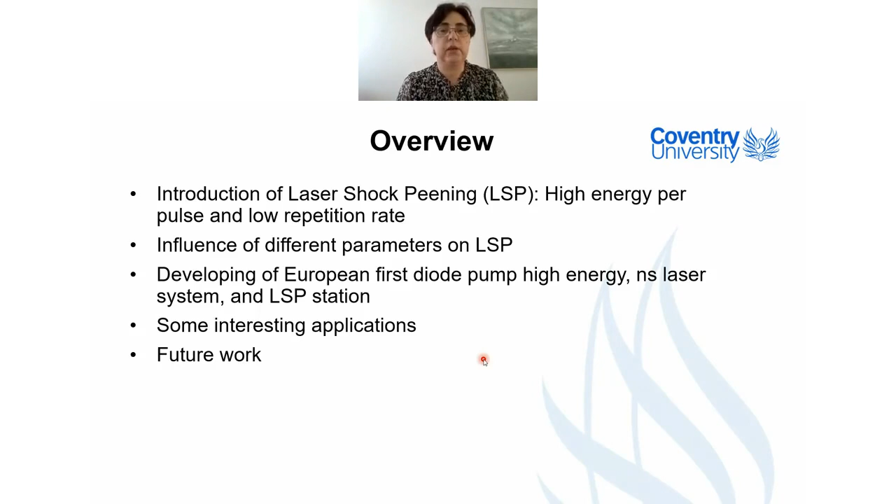Thank you, Sam, for introducing me and giving me the opportunity to speak today about laser shock peening, a very nice laser-based technology. I will be speaking mostly about this technology from the point of view of what is important from laser parameters and why we need certain kinds of special parameters there.

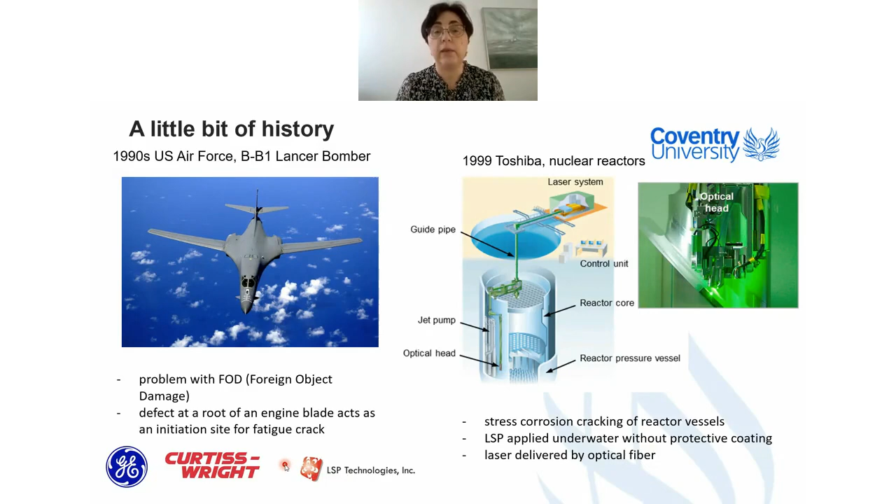Here is the overview of my talk. I will be starting with the introduction of laser shock peening, and I will be speaking on something targeting the so-called high energy per pulse and low repetition rate regime. I will explain the influence of different parameters on laser shock peening. Then I will share with you a little bit of experience of developing the first European diode pump high energy nanosecond laser system, which was adapted for laser shock peening, and also speak a little bit about how the laser shock peening station was developed, and show you some interesting applications. And I would finish with my view on future work.

So a little bit of history. Laser shock peening started to be implemented more or less at the same time, almost in America and in Japan, for two completely different applications. In America it was implemented by GE in order to solve so-called foreign object damage, while in Japan, Toshiba was solving stress corrosion cracking in reactor vessels.

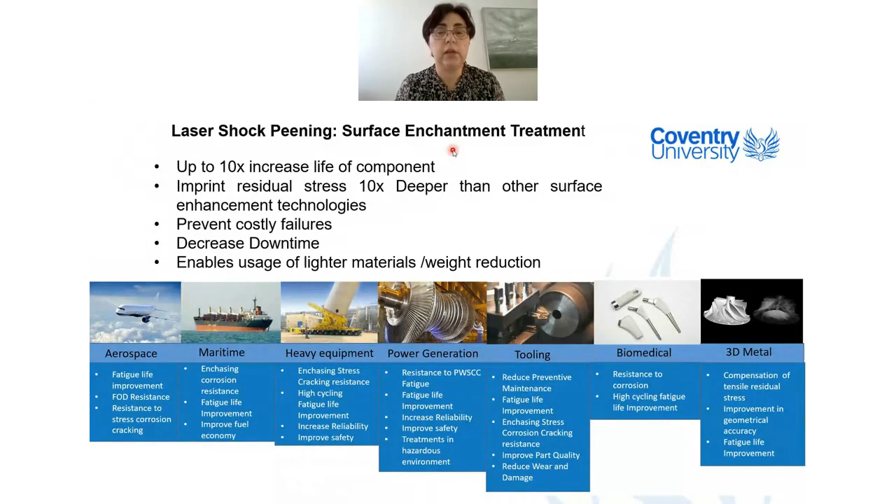Very soon after that, the first metal improvement company was established, which is now Curtiss-Wright, offering mostly laser shock peening as a service. We have one of their cells inside of Rolls-Royce, for example. Laser shock peening technology is also offered by an American company which is nowadays offering the machine for laser shock peening.

Laser shock peening is a surface enhancement treatment, which allows you to increase the lifetime of critical components up to 10 times. It's imprinting residual stress 10 times deeper than other surface enhancement technologies. It's helping you to prevent costly failures, decrease downtime, and enable usage of lighter materials. I've just listed different kinds of industrial sectors where laser shock peening was tested or is already implemented.

As I said, I will go on to speak about laser shock peening in the high energy and low repetition rate regime. First, I would like to say that laser shock peening is a cold working process, meaning that you are not melting the surface with this process.

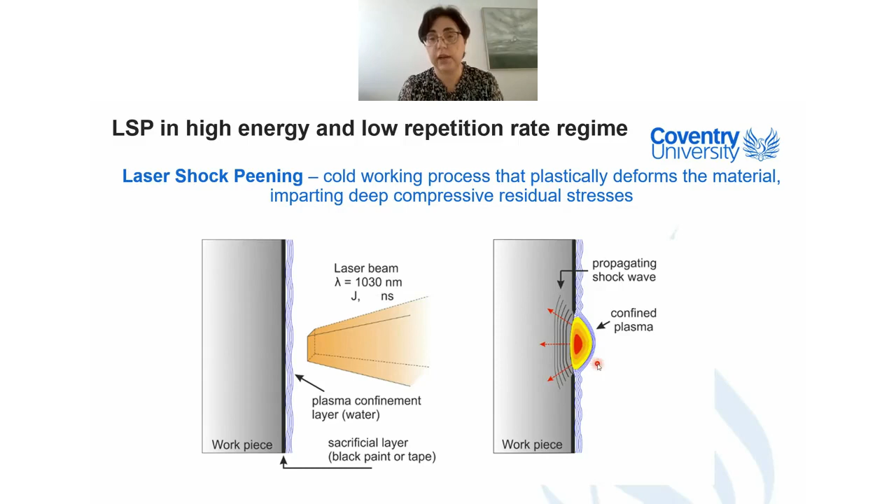This process plastically deforms material and imprints deep compressive residual stress. When I say deep, we are speaking about more than millimeters.

Here's how that looks: you have your workpiece, then you put a so-called sacrificial layer. Here is the black tape, usually a vinyl one. This tape has two roles to protect your workpiece from heating and also for being ablated to create the plasma.

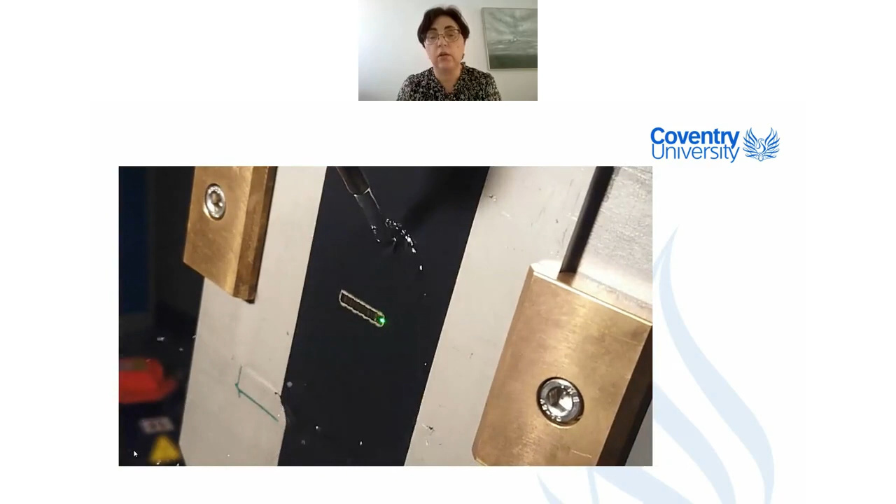In this regime, you're using a laser beam, usually infrared, in the joule energy regime with nanosecond pulse duration. Once this pulse ablates the sacrificial layer, plasma will be formed. If there's no confinement media, in this case water, the plasma will expand, leaving very shallow residual stress in the surface. But if we put water on top, there's no space for the plasma to expand, so a shock wave will be created and propagate inside the material.

So how does that look... can I start this video? I can't start the video now for some reason. If you turn the laser pointer off for a second. I'm trying, yeah, okay.

So here is the video. As you see, we have the part. The green light is not a laser, it's just a light showing you where the laser pulse is coming from. It's infrared in this particular case.

You have the black tape, and there is a water layer. You see the water layer is really thick, a couple of millimeters. The laser pulse is coming next to each other, ablating the material. In the moment when plasma is not confined anymore, you see the splashes back.

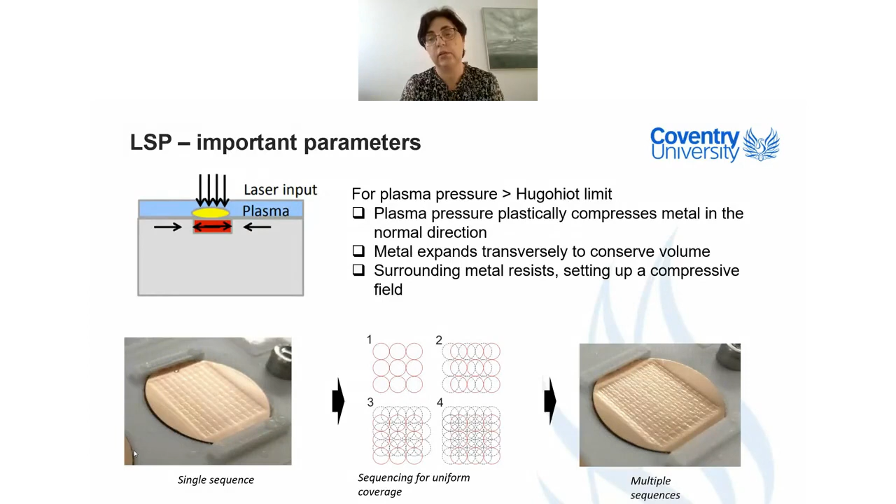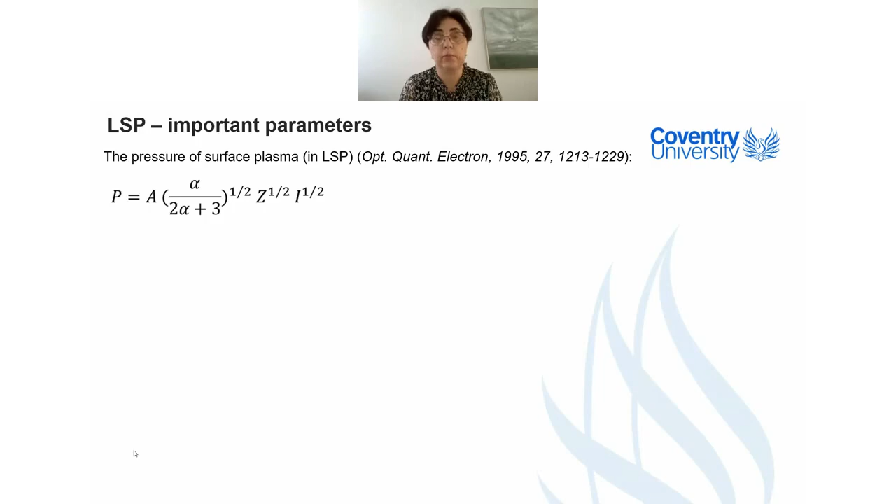So what is happening? We have plasma pressure, which plastically compresses the metal in the normal direction. The metal would like to expand to conserve volume, then the surrounding metal resists, setting up a compressive field.

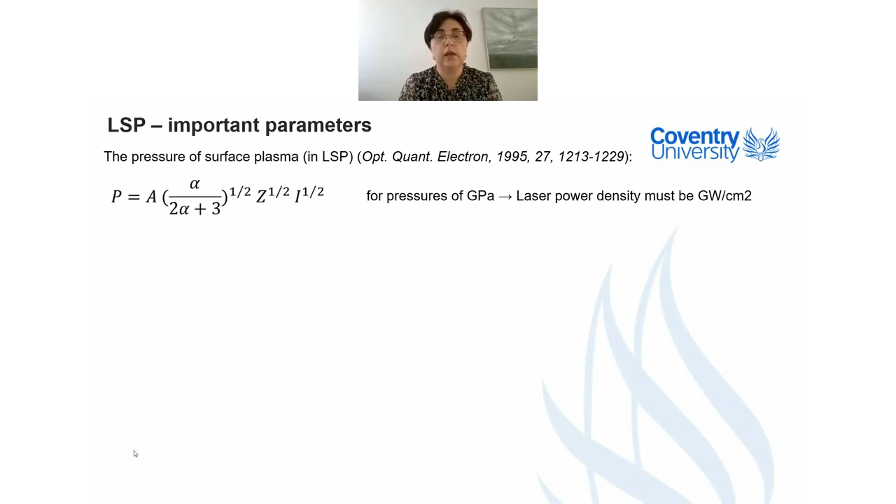So now, as you see in my video, by treating an area, moving the laser spot next to each other, you can create residual stress over the treated area.

Here I also would like to point out that you can use something we call multiple sequences. Basically, you put one tape, treat it with overlap or no overlap, then remove the tape, put a new tape, and shift the next pattern a little bit. That way you're controlling how uniform the treatment is around the area, and you also reduce the roughness of the treated surface.

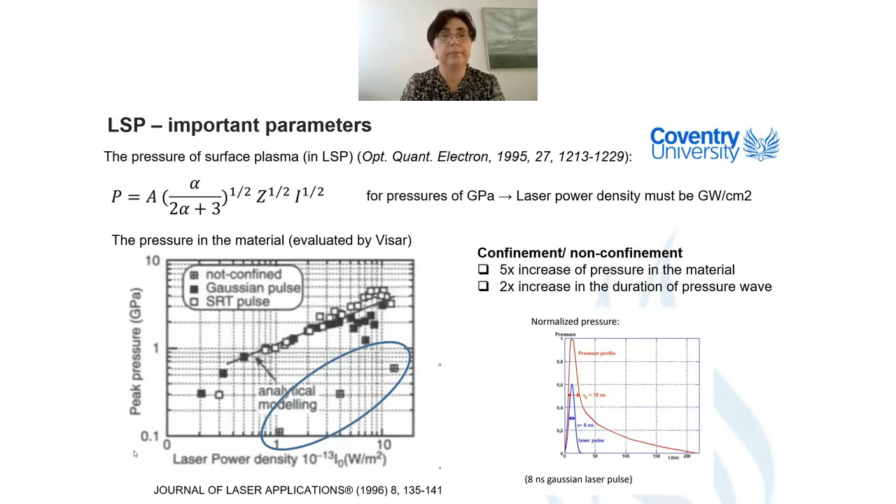I'm first going to point you to an article published back in 1995. In this article, you can see that for a pressure of a gigapascal, you need laser power density in the region of gigawatts per square centimeter.

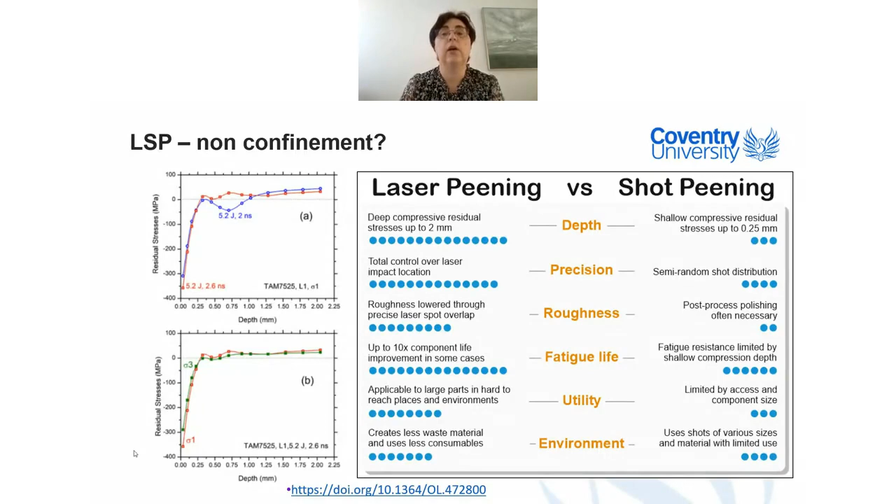First, I want to show you something on this graph. If we don't have confinement media, as I said, we can put some pressure inside the material, but with confinement media, we increase the pressure up to 5 times. In addition, we increase the duration of the pressure wave. Why is the duration important? This sets the time for how long the change will be traveling inside the material, or more specifically, how deep you will imprint your change.

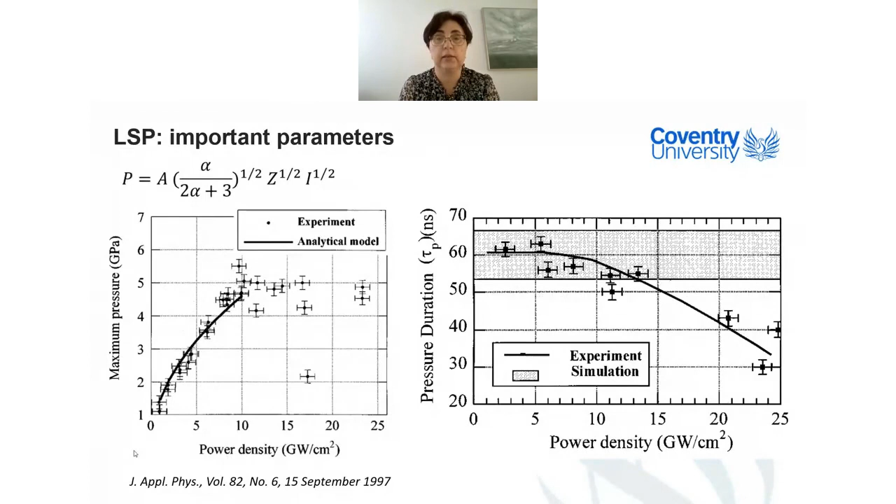So can we do laser shock peening without confinement? I know there's a recent publication about that. Yes, as I said, we can put residual stress on the surface, quite high level, but it will be very shallow. Laser shock peening is a method mostly trying to find applications where shot peening is not applied, and one of the main benefits of laser peening is the capability to go very deep into the material. So yes, you can do it, but using such an expensive, high energy laser is, from my point of view, a bit of a waste.

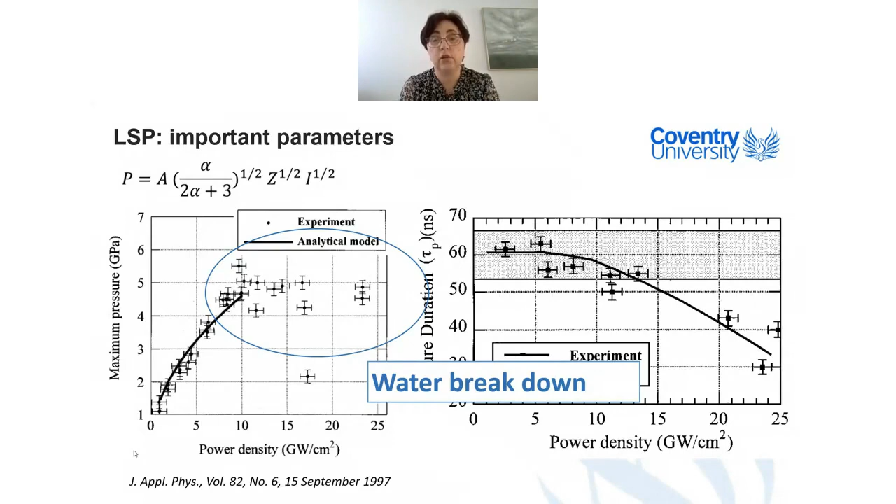Another important parameter: if we look and say pressure depends on power density, everybody would say, okay, let's increase power density to infinity and get whatever I want for maximum pressure inside the material. But unfortunately that's not true, and it's not possible, as you can see from the graph on the left side.

Around 8 to 10 gigawatts per square centimeter, we get some effect which stops us from increasing maximum pressure in the material. At the same time, pressure duration inside the material starts decaying, and the reason for that is called the water breakdown effect.

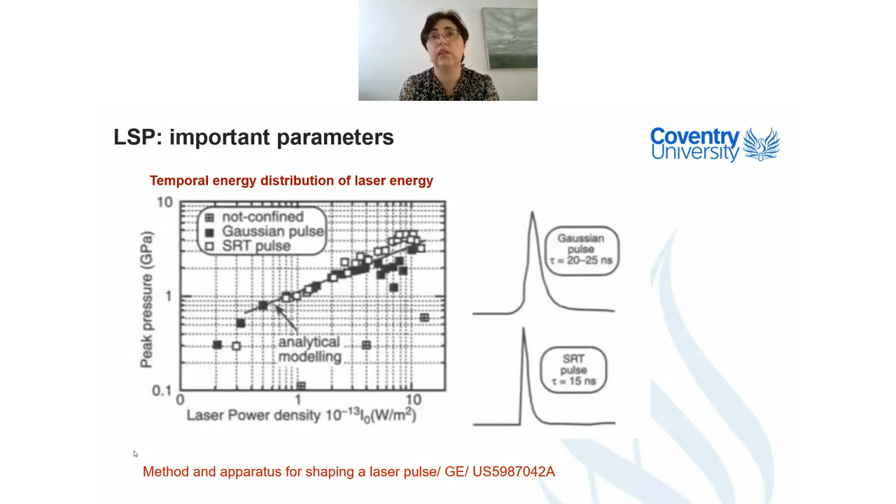How to explain that best? Water, in this case, is the confining media, meaning it has to stay transparent and should not interact with your laser. In the regime when we reach water breakdown, meaning your laser starts creating plasma in the water, this plasma will be reflecting the beam in some cases or absorbing the initial energy.

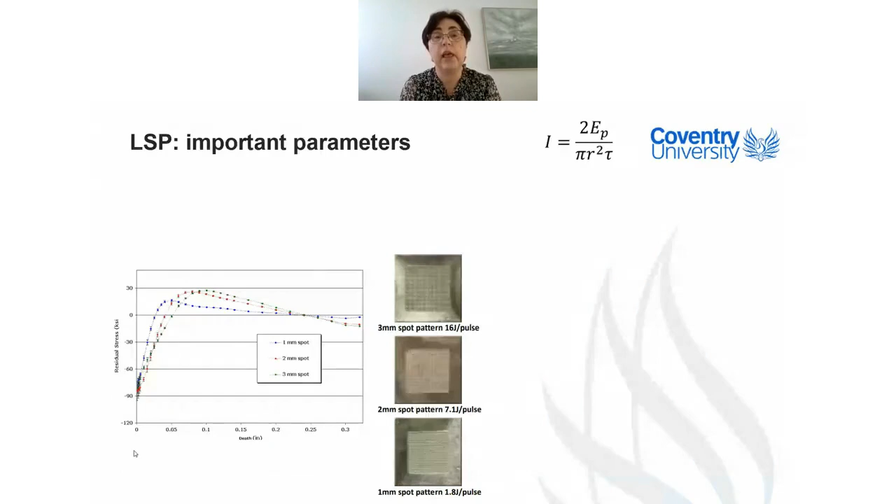Another thing I'd like to show you is some temporal energy distribution trick. If you look at this graph, the black and white squares show that we're having this water breakdown, corresponding to the so-called Gaussian temporal energy distribution. GE put in some invention, already patented, where they were able to cut this initial part of the beam so they postponed this water breakdown. As you can see from this graph, in that way you can increase the peak pressure which you are giving to the material.

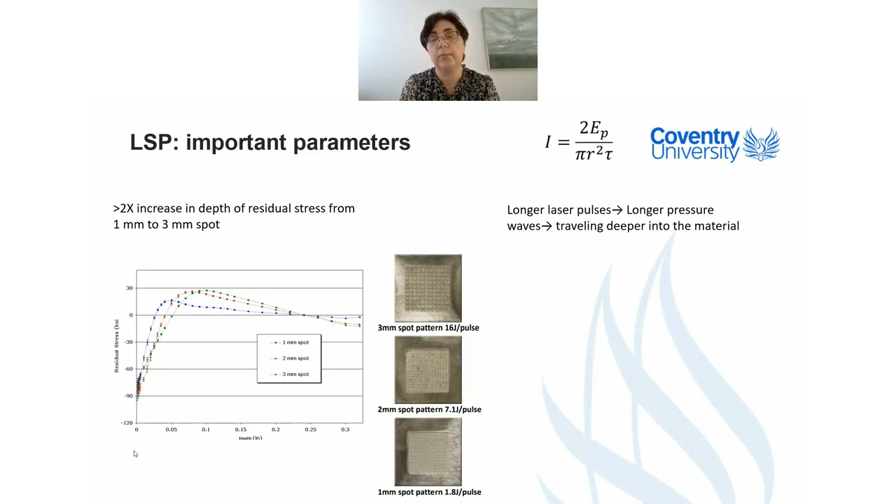If you look at just laser fluence, you'll see that it depends on energy per pulse, pulse duration, and spot size. If we keep the same value but change just the spot size, you can see we increase the depth of residual stress by 2 times if we go from 1 to 3 millimeters. But at the same time, you need to increase energy per pulse from 1.8 to 16 joules.

Not only are you imprinting your residual stress deeper in the material, but larger spot size also increases the speed of the process. Another factor I mentioned is pulse duration. We already saw in previous slides that longer laser pulses mean longer pressure waves, which travel deeper in the material, and you can see from this graph that this is obviously the case.

Here I just want to show you how the cell looks for Curtiss-Wright, because we took inspiration from them. They are offering this service on an industrial level and doing it really professionally and nicely.

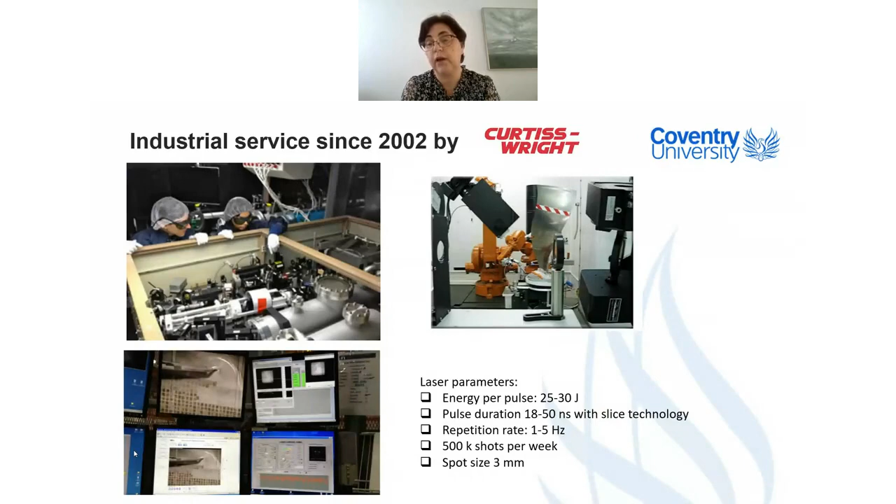Their laser system has a pulse energy between 25 and 30 joules, and I think they even have lasers up to 50 joules. Pulse duration can vary between 18 and 50 nanoseconds, and they have this slicing technology for temporal beam shaping. They use a repetition rate between 1 and 5 hertz because their laser is a so-called lamp pump system.

Being very advanced in laser technology, they know that those lasers can sometimes be unstable. This is why you see in the picture, bottom left, screens showing the monitoring of every laser pulse, both after the laser and also on the material.

At the top you see probably one of their more complex stations, where they have a part mounted on one robot. Water delivery is on another one - you don't see it, it's on the back side. And the black box close to us is a scanner, responsible for beam distribution.

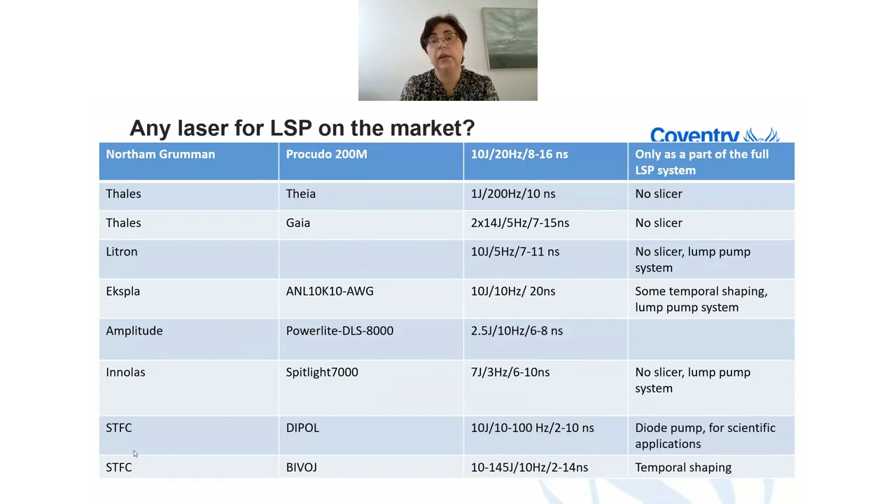For example, the question was even more complex when we were starting to approach laser shock peening: can we really buy or find a laser for laser shock peening on the market? So I put here, besides the Northrop Grumman laser, which is American, lasers which are produced in Europe.

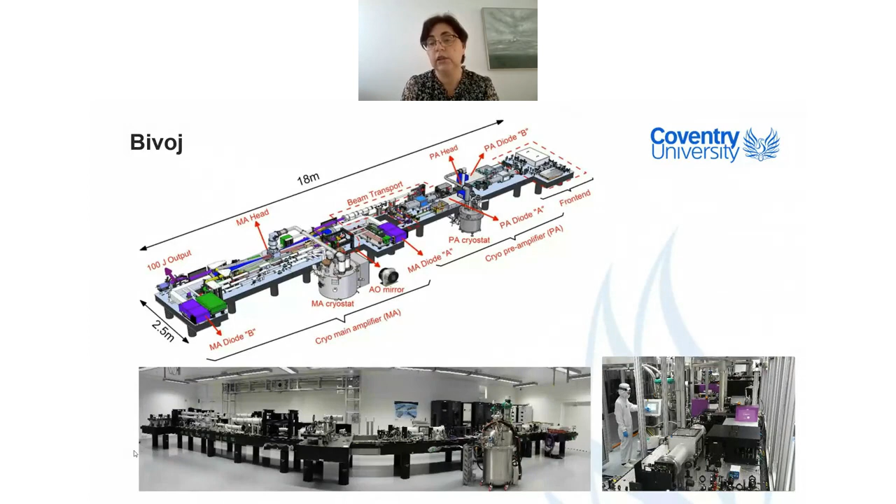And on the bottom you have two industrial scientific lasers. First, what you can see from this list is that most of these lasers have enough energy per pulse, but the pulse duration is very short. And as you'll recall, and will also see from some applications I'll show, pulse duration is very important and defines how deep you will imprint residual stress.

Another problem with most of these lasers is that they don't have either temporal shaping or, very often, spatial shaping. And from an industrial point of view, maybe another important point is that most of these lasers are very expensive.

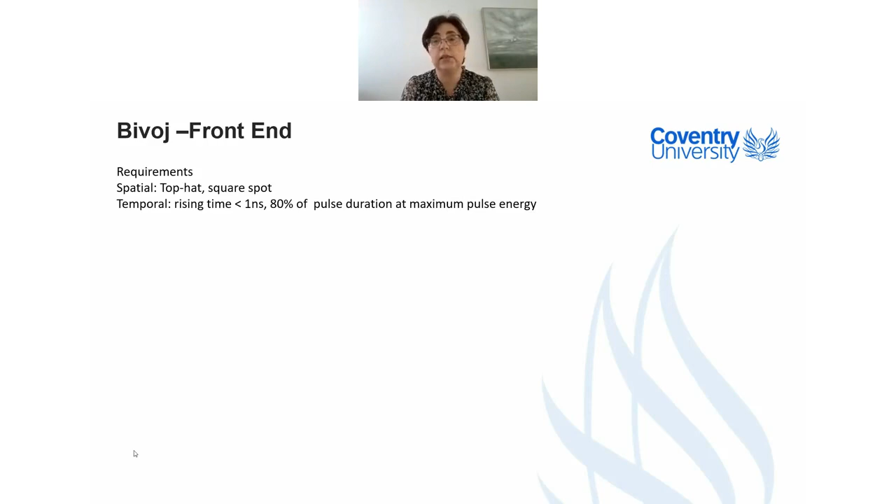I will show here the Bivoj laser. This is the laser that I was involved in developing and adjusting for laser shock peening applications. I will not go into detail about this laser - I'm just showing these pictures to show how complex and how big this laser is.

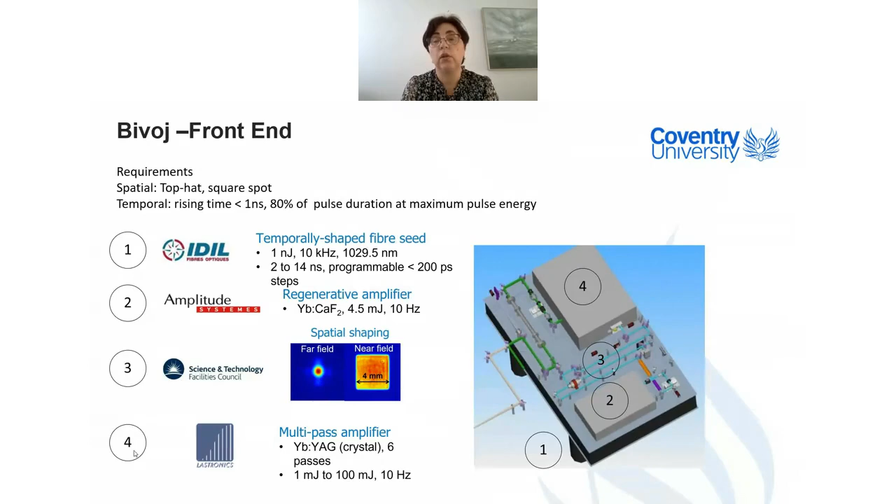For laser shock peening application, we were using only after the first amplification. We are not using 100 joules because there is a missing isolator, which stops reflection of the light coming back to the laser and destroying it.

For this laser, we designed something called a front end, because we wanted to have a top hat beam with a square shape. We also wanted to have a fast temporal rising time, meaning to minimize the time the laser needs to reach maximum energy.

Also, we wanted to have 80% of the duration of the pulse at maximum pulse energy, and for that application such a front end was created and designed. As you can see, it's involving 4 institutions.

Similar to the laser, I will not go into detail about that, but if somebody is interested, I can provide more information. This is the laser cell we had, and the laser beam.

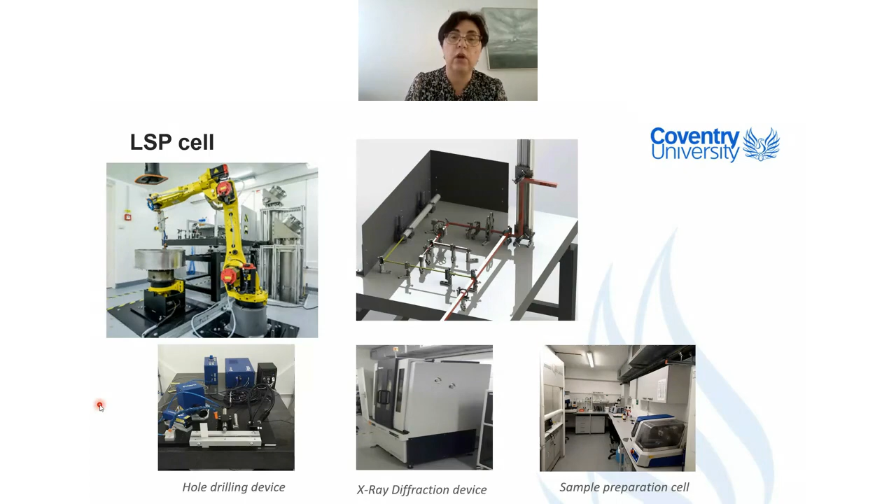It's coming—maybe I can use the pen again. The laser beam comes through this tube because the laser is below the cell. If you look at that drawing, after this mirror, most of the beam goes through the system for controlling the spot size.

Next to the laser, which is not possible to see on this drawing, we had the attenuator, and this additional small part of the beam was used, similar to how Curtiss-Wright uses it, to monitor the laser pulse, both near and far field.

The laser beam is then distributed over the sample, which is mounted on the robotic arm. Here is also a water delivery system. You will see more about this system in some videos I'm planning to show you.

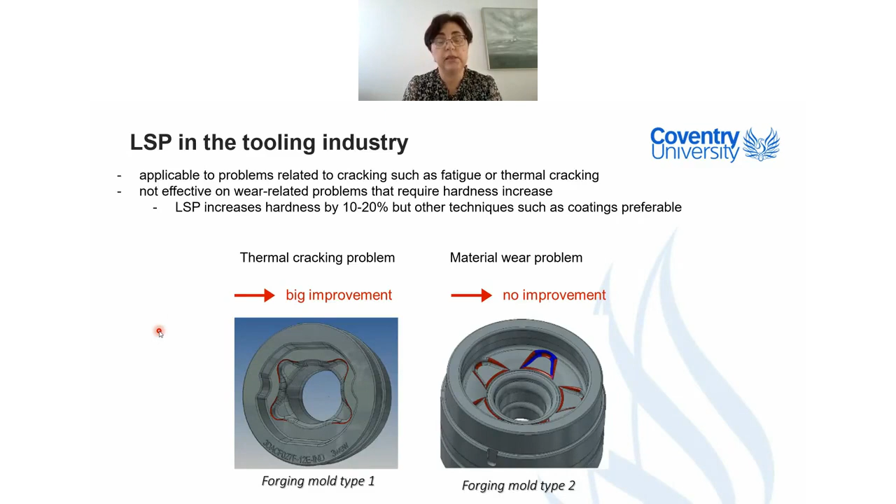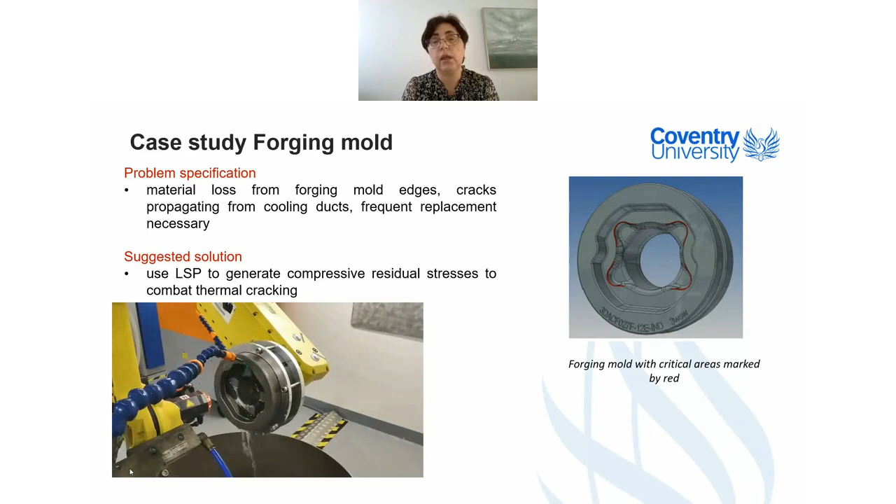So let's show now some of the applications. This is the tooling industry. What I'd like to mention here is that it's very important to understand the problem you are treating. In this particular case, there are two problems: one related to cracking, such as fatigue or thermal cracking, and another related to wear.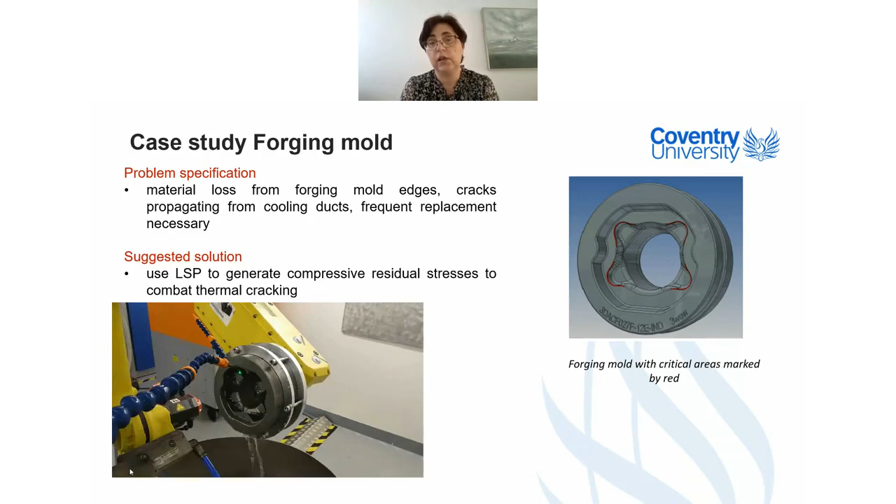Thermal cracking we were able to solve with laser shock peening, but the wear problem, which is usually solved by increasing hardness, we only slightly influenced, because laser shock peening is not a method that increases hardness. So the problem in this particular tool was solved by first doing laser shock peening and then applying very hard coatings.

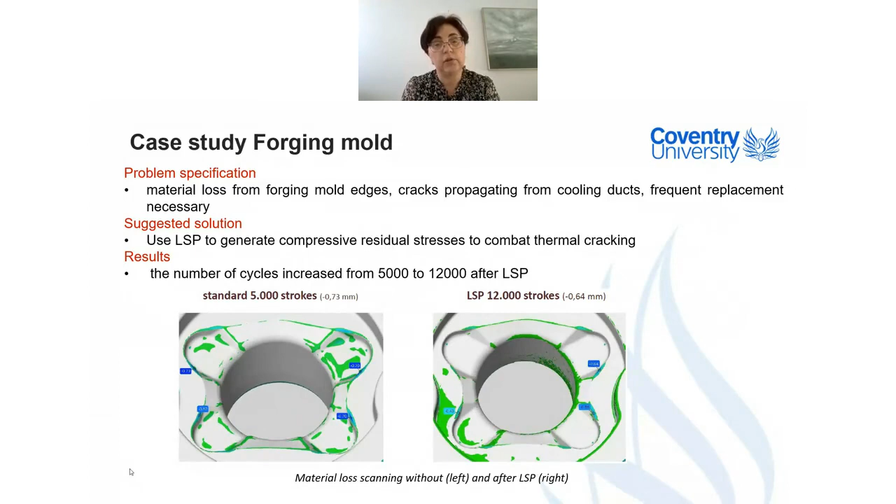Now I have to switch the laser pointer again in order to show you the video of how this part was treated. We are treating only this red part, shown in the image in the right corner. The green light is not a laser—it's just a diode light showing where the treatment is done.

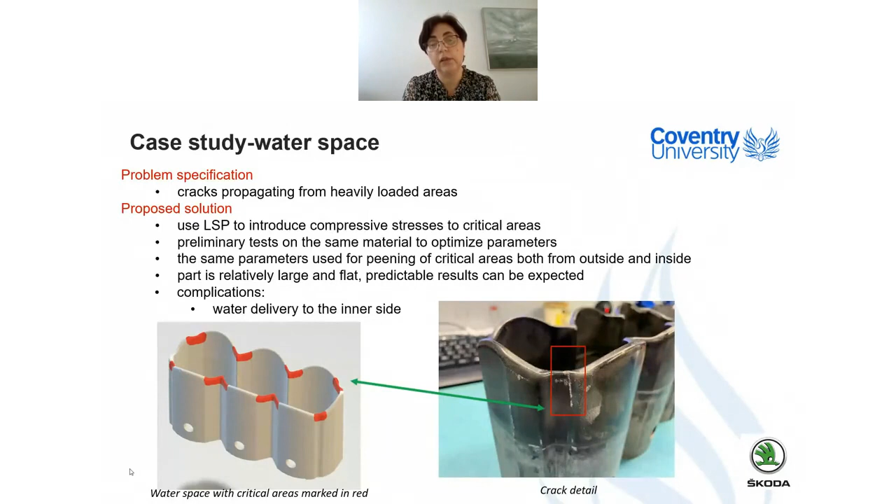As you can see, we are using a 10 Hz laser, but the speed of the process here is mostly defined by the speed of moving the parts. So I think to increase productivity it would be better to use an arrangement very similar to what Curtiss-Wright is using.

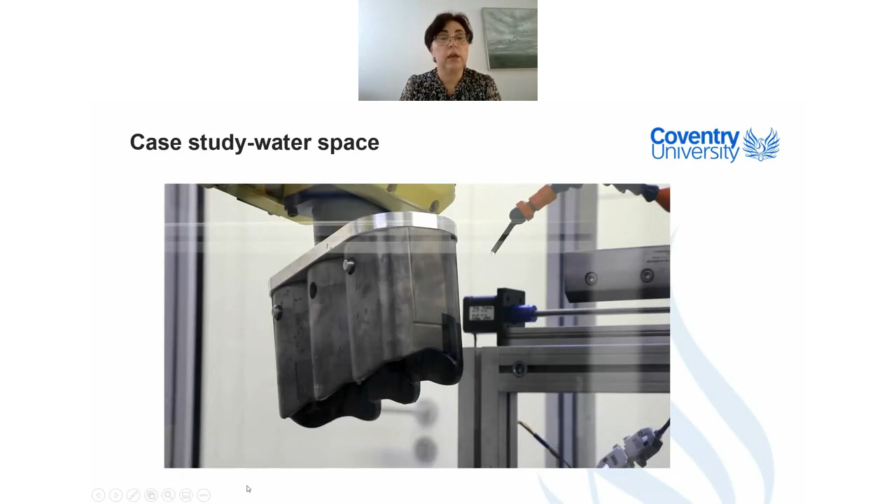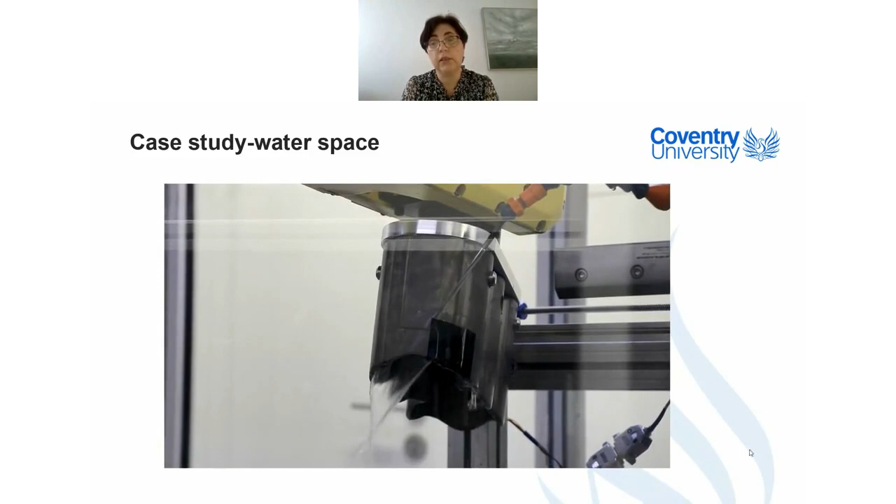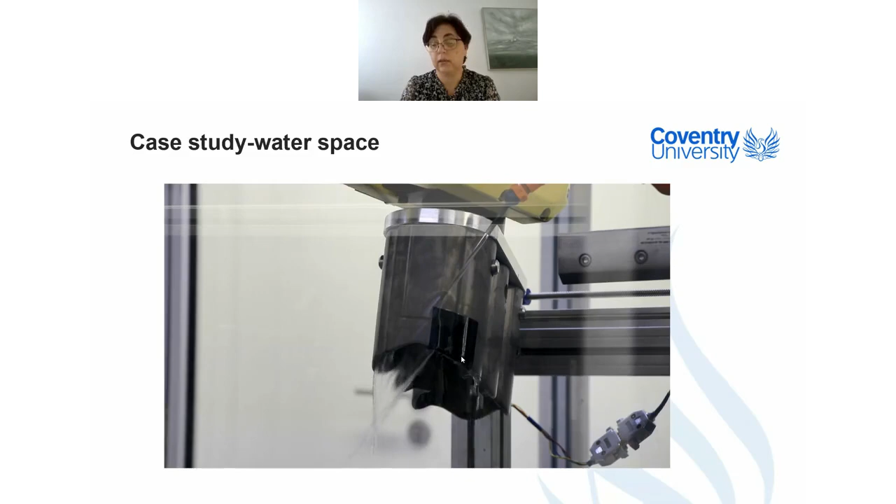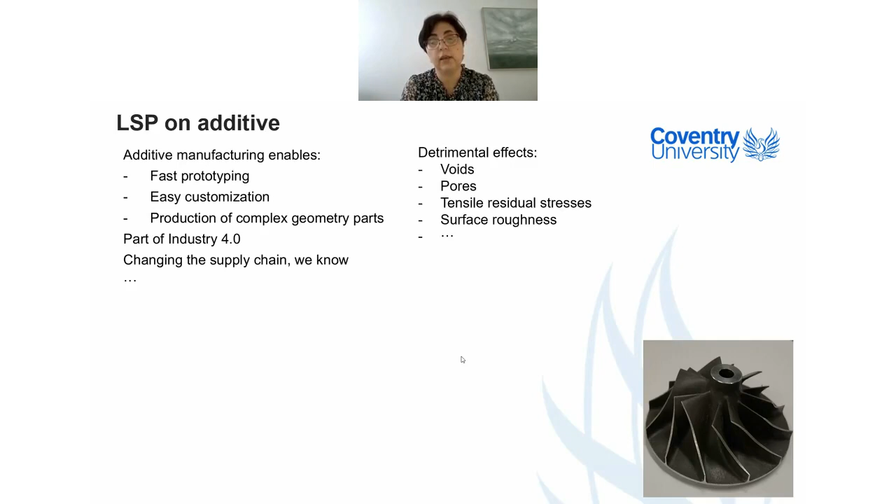Another tool is coming from Skoda, and there you see crack propagation in heavily loaded areas, marked in red on the drawings. In both applications, what was very nice is that since the tools were already in operation, we really knew where the problems were and what kind of problems they were.

Now I will run this video. It will be a little bit noisy because I want you to experience how laser shock peening sounds.

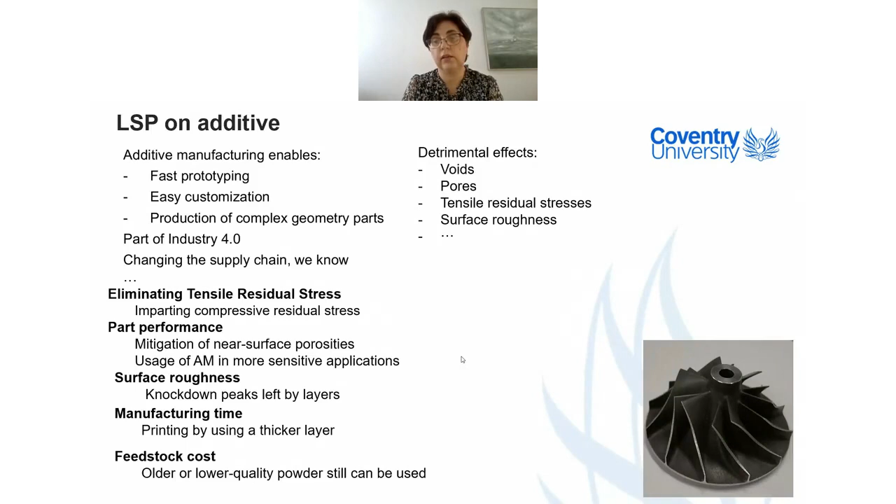So you see the plasma going out and clicking. It's showing that this is really a mechanical process.

After the tooling, one of the sectors we were looking at is additive manufacturing, and all of us are aware how interesting this technology is to industry. But at the same time, there are several problems like voids, pores, tensile residual stress, and surface roughness.

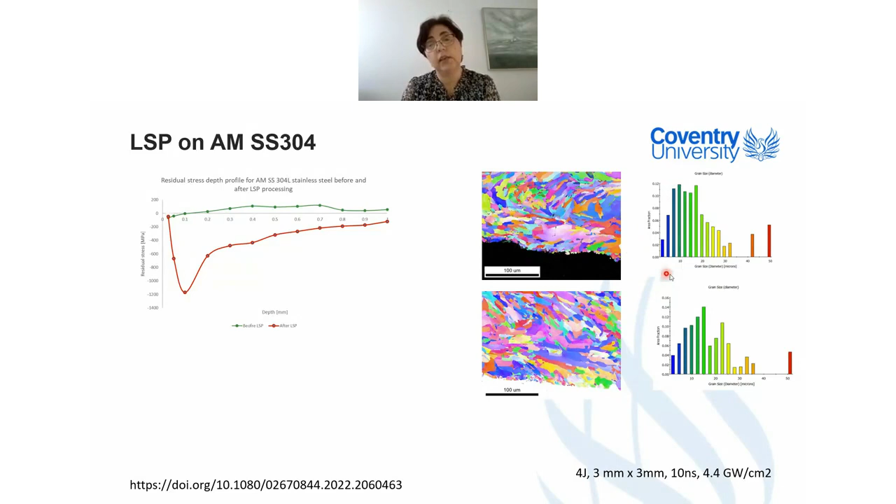So we were investigating if we can, for example, eliminate tensile residual stress, increase part performance by mitigating near-surface porosities and allow those parts to be used in more sensitive applications. We were also trying to improve the roughness, reduce the manufacturing time by using thicker layers in the printing, and minimize the influence of powder quality on cost.

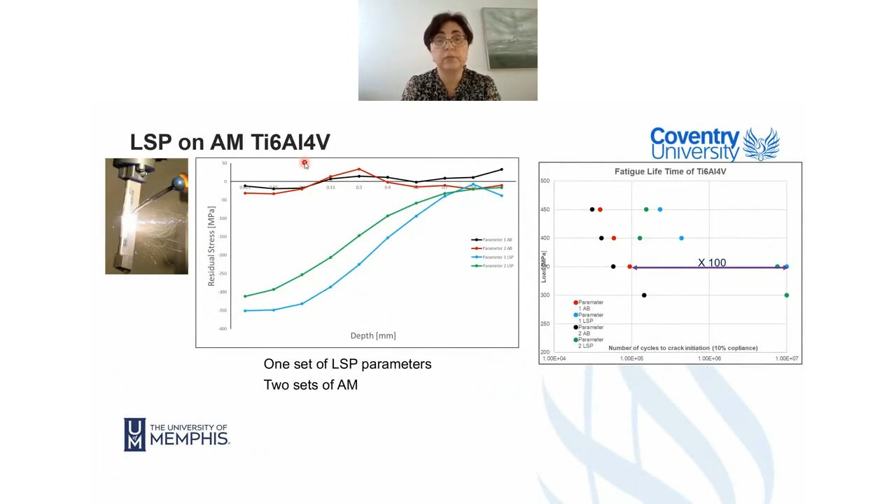So here I'm showing the data on LSP on additive manufactured stainless steel. From the graph, you see that we were able to imprint residual stress quite deep, over 1 millimeter. And in fact, if you look at the grain size, you see that we significantly changed the grain size, making them much smaller. After that, we did a fatigue measurement.

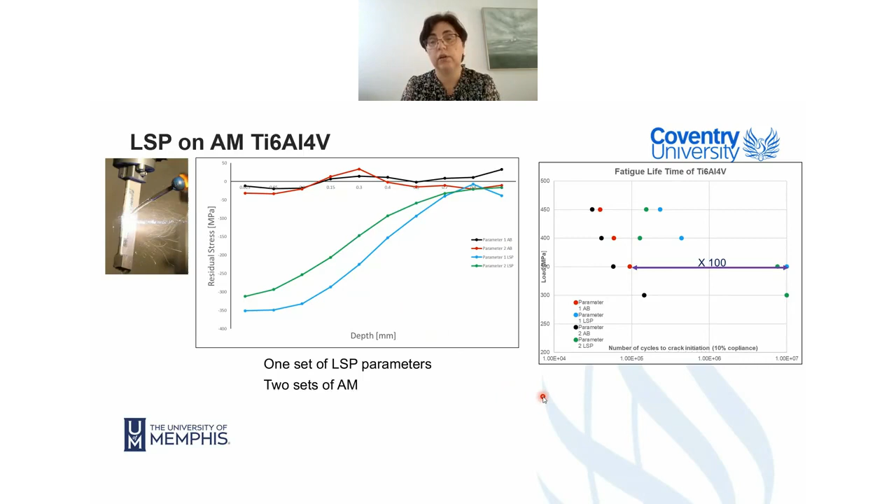AB is as-built—these are the original parts—while the other two correspond to laser shock peened samples. The difference is that in one case we used vinyl tape, and in another aluminum. But in all cases, you can see that we were able to increase fatigue lifetime, or the time when we start detecting cracks.

After that, we started working also on titanium alloys in cooperation with Memphis University. What you can see here is they were printing parts like that using two different methods, where one corresponds to a more optimized and the other to a less optimized process.

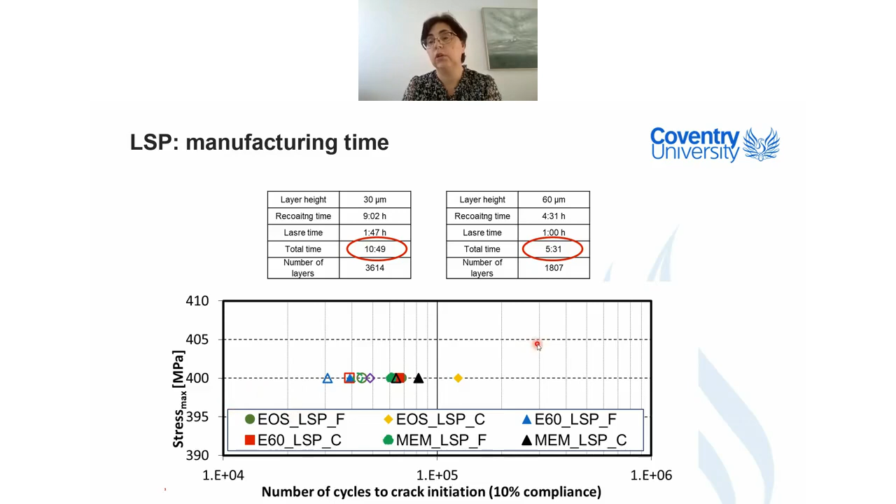The green obviously represents the less optimized parts, and we peened those kinds of samples, then performed fatigue lifetime testing. You can see that for all of these samples, we were able, depending on the load, to prolong the lifetime. For example, for a certain one, we were able to prolong lifetime up to 100 times. So even for the less optimized process, it was possible to improve the performance.

As I said, we were also working on the possibility to minimize the printing time, so we increased the layer thickness of the printing. All of these are without laser shock peening, while these with full signs are peened.

Obviously the best performance we had was for the most optimized EOS process with laser shock peening added. But you can see that, for example, for this one printed at 60 microns, if we do laser shock peening, we were able to get results very similar to other MEM or EOS optimized processes.

So in conclusion, I would like to say you need to think about the optimum parameters of the laser you should use. I would say in this regime, it's good to have 10-plus Joule, because that allows you to play with the spot size and also allows a faster process. Pulse duration is very important because it defines how deep you can go into the material.

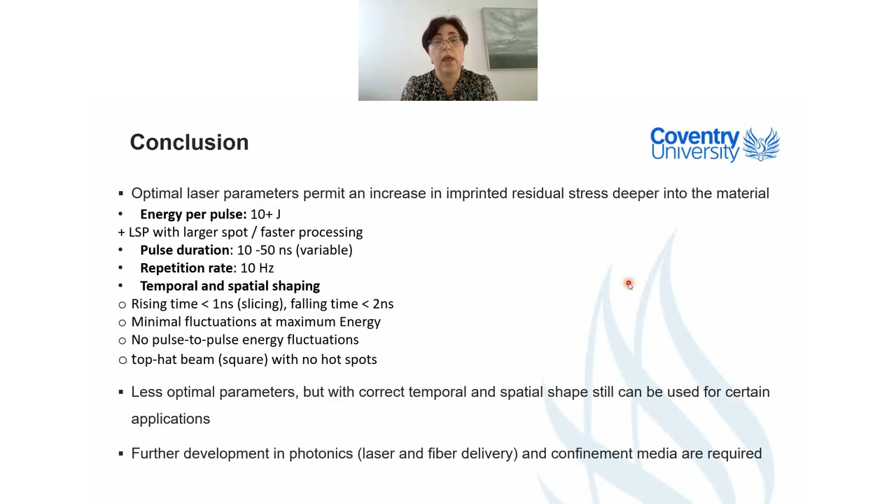Then I think what is really important is the temporal and spatial shaping. I wrote here rising time shorter than 1 nanosecond, and falling time less than 2 nanoseconds. You need minimal fluctuation of the energy at the maximum, and no pulse-to-pulse energy fluctuation if possible. The top-hat square beam gives you a lot of opportunity to better define your sequences.

But still, as you see, even with less optimal laser parameters, if you do proper temporal and spatial shaping, you can still find applications where you can benefit from using laser shock peening.

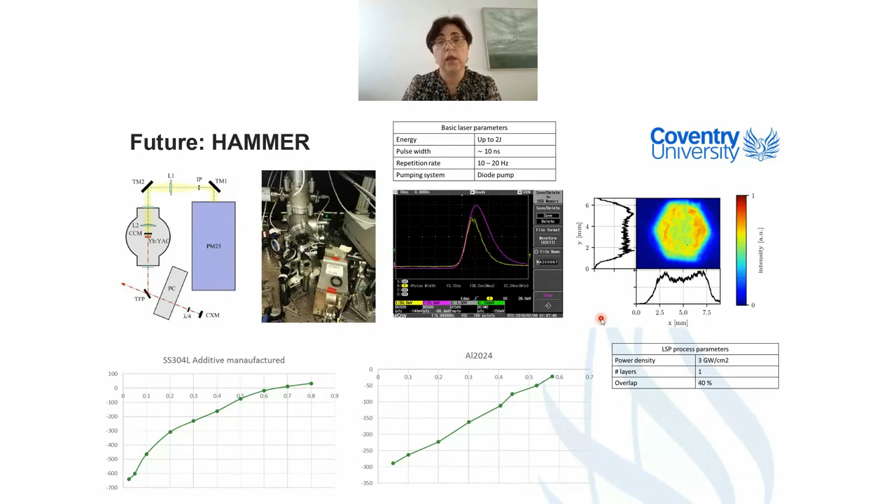If we're speaking about further development, I see it mostly in photonics, because, as I showed, we are still missing a suitable laser on the market. Another thing we're missing is fiber beam delivery, which can be useful for treating in servicing and for parts that are difficult to approach. We are also missing solid confinement media, because there are still a lot of applications where water cannot be used.

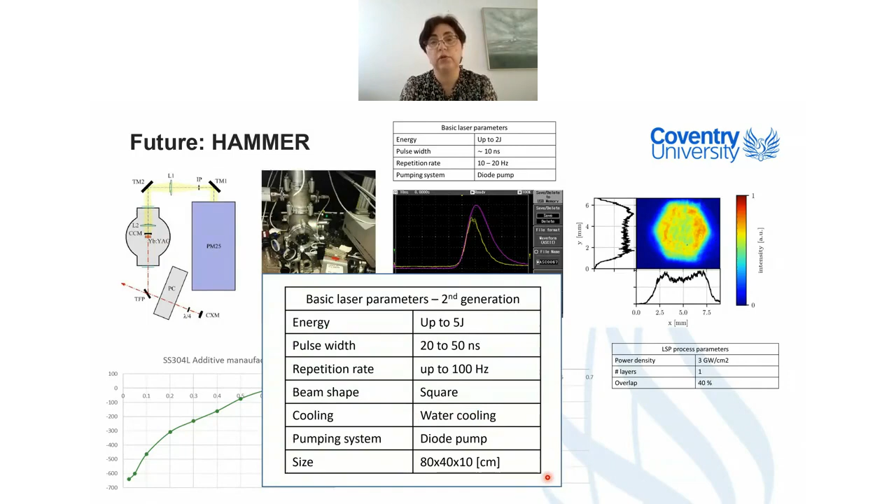I want to also show you a bit of work on the small size laser. We were trying to see if, based on the knowledge we learned from developing the big laser, we could build a small one that is portable and able to work. This first prototype had around 2 Joule and 10 nanoseconds, with a repetition rate of 10 to 20 hertz, and it's a diode-pumped system.

And what you can see, for example, that from stainless steel, we were able, even with such a very tiny and cheap laser, to get significant residual stress on the surface and go relatively deep in the material, both for steel and aluminium.

Maybe it's interesting why we tried this shape of the beam. We were testing if this would give us better treatment of some special 3D geometries.

And now this laser will be upgraded to go up to 5 joules, having longer pulses. Also, the liquid nitrogen cooling will be changed to water cooling. And maybe what is most important is this laser has a very small size.

And in the end, as we discussed before this presentation, I would like to say a special thank you to the people who are really helping the team in Prague to very fast adopt and develop this method. These are different pioneers and people who developed this method, and I advise all of you to either approach them or look for their papers, because they explain and can guide you through this method.

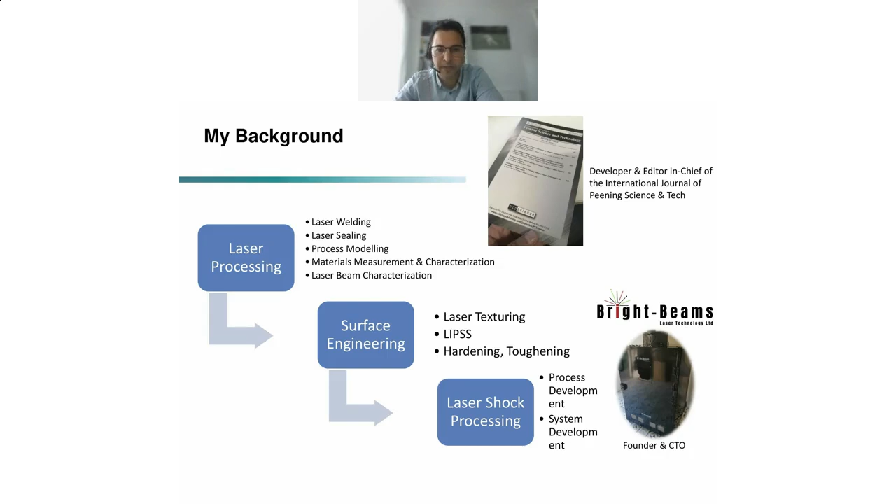So going back to Pulsate, it's a multi-organization consortium project led by AIMEN in Spain. They're a laser center, and the other partners include Sintef in Norway, CEA in France, Fraunhofer in Germany, the Center for Physical Sciences and Technology in Lithuania, the MTC, which is where I'm based in the UK, Funding Box, Epic, and ClearGo. They're responsible for managing the funding and the dissemination.

So all of these partners got together several years ago to apply for the European Horizon 2020 program, which is where the core of the funding is coming from to support this project.

Pulsate is there to foster pan-European collaboration, empowering SMEs to grow their capabilities in laser-based advanced and additive manufacturing. So it includes providing technical advice, guidance, funding support, as well as route to market for new technologies, to simplify it really.

So the markets covered by Pulsate, they're not limited to this, but they're focused on aerospace, which is where, for example, laser shock peening challenges are addressed. Medical devices is another market, industrial machinery, automotive, customized electronics, textiles, and clothing. The idea is to encourage and apply laser-based advanced and additive manufacturing in these markets to address burning issues and challenges, and help technology development from these sectors.

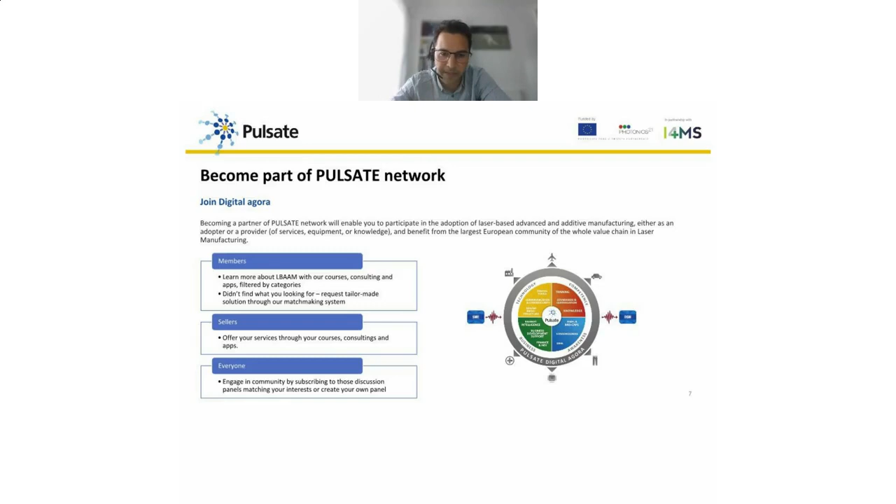So who can join? Well, if you're a service provider, equipment provider, an educational institute, or a stakeholder interested in laser-based technology, you can join and contribute to this domain. There's various grades of membership available as well, so it goes all the way to gold membership, and respectively, the benefits obtained for that membership are different to, for example, a free membership, but it's there for people to contribute to.

Pulsate in the recent past has been offering funding support for 3 months, for example, 25k in euros. There's been a couple of calls supporting experimental development and proof of concept studies for technology providers and SMEs coming through with new technologies, and there's been some success stories we can share with you.

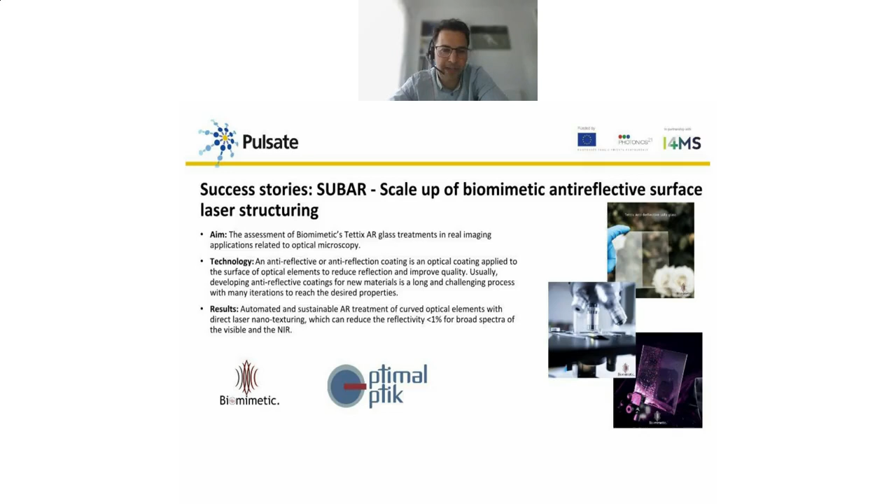For example, a project called Subar scaled up biomimetic anti-reflective surface textures or structures through laser surface structuring, doing this on glass to improve optical microscopy applications. The impact of the results achieved was less than 1% reflectivity in both the visible and near infrared spectrum.

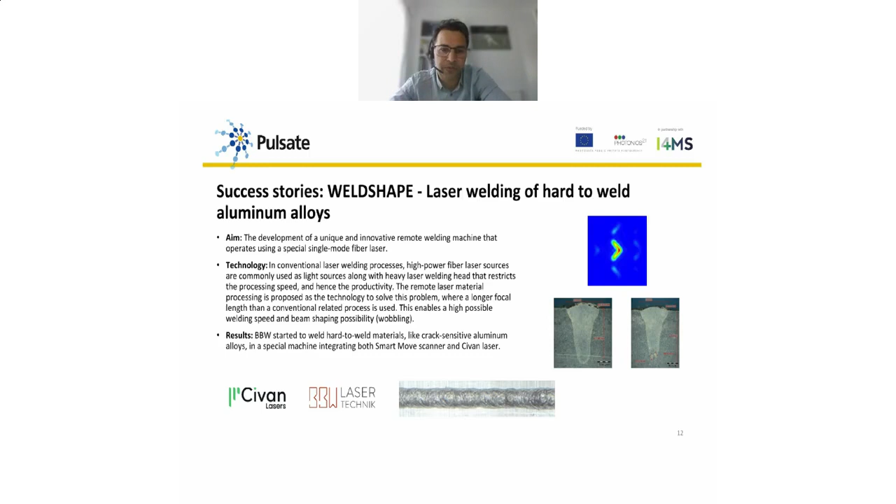Another project called WELDSHAPE offered a new beam manipulation or beam shaping technology to weld crack sensitive aluminium alloys and hard to weld materials in general. They were able to achieve deeper penetration and make the technology more digitalized and integral with other technologies. It was funded and progressed from very low TRLs, from TRL3 maybe to TRL5, 6.

The next project on the list is called Loom-State, which adopted laser cutting as a replacement technology to their conventional mechanical cutting methods for the garment manufacturing sector. Using smart nesting techniques, they achieved less material waste, reaching near to zero waste, reduced carbon footprint, reduced non-conformance, and manufactured in a smarter way than before. So again, benefiting from this program.

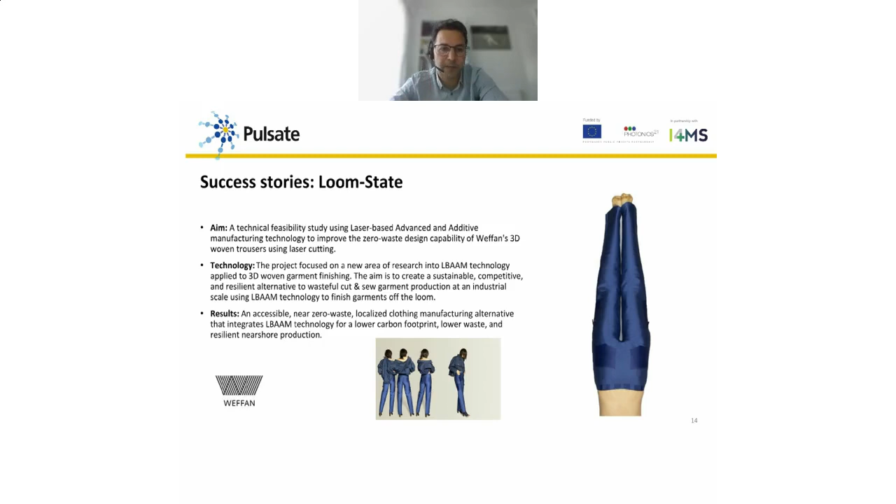At present, there is an ongoing call which people can apply for. It's an adopters and end users team-up call, where people from that background can team up and apply for this funding to develop specific technologies within the scope of Pulsate. If you want to know more, feel free to get in touch with myself, or there are details here which you can refer to for further information.